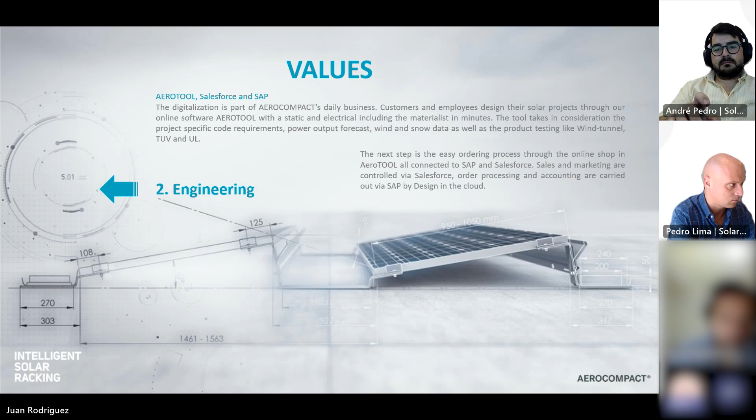Second, engineering. Without a strong engineering team, we will not be able to produce such valuable structures. Aerocompact takes pride in having a very strong engineering team based in Sulz, Austria. More than half of our workforce works in an engineering role. This has allowed us to work with economic powerhouses such as Amazon, IKEA, Audi, or Aldi. Also, a strong emphasis on engineering has led us to the full digitalization of the business with the help of our tool, AeroTool, which we'll talk about later.

And finally is the product, the end product. We carry 4 product lines: compact flat for flat roofs, compact ground for ground mount, compact metal for metal roofs, and compact pitch for pitch roofs. All are tested at a high level internally and externally. And the constant innovation and digitalization allows us to design and optimize our products regularly and make them more attractive to the market.

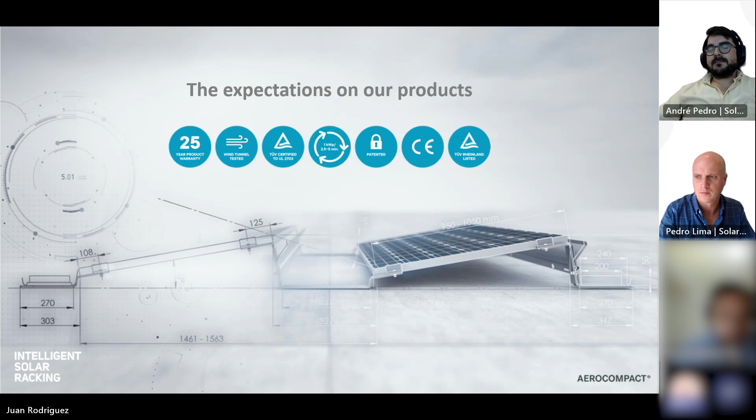So I would now like to give you a glimpse into the very important engineering services behind our products and the services we provide our clients. We place high demands on our final products. We have high expectations. Through our engineering services and high standards, we have obtained all necessary certifications for our products. We have all the CE markings, all the TUV markings. And our strict engineering practice has resulted in being able to provide you with 25 years warranty on our structures, which I think is one of the highest in the market at this moment. And a very important part of our product development is the wind tunnel testing of all our structures. Here at the Institute... I'm sorry.

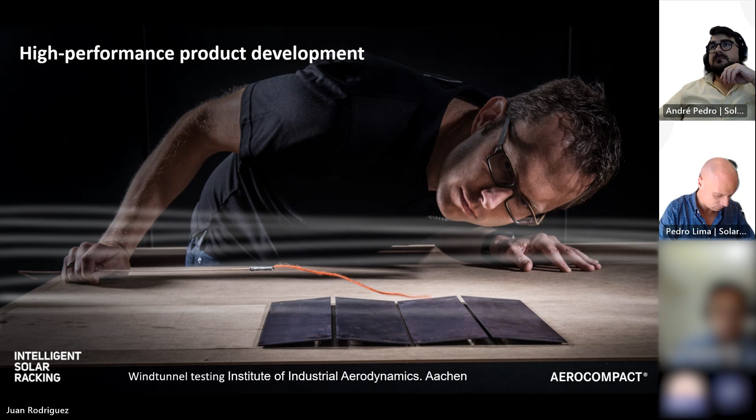Another institute we work closely with is the Institute for Physical Material Research in Vienna. We use their services and know-how to guarantee the strength of the material in our structures. And these are just some photos of the ongoing testing we have with them. So, material strength test.

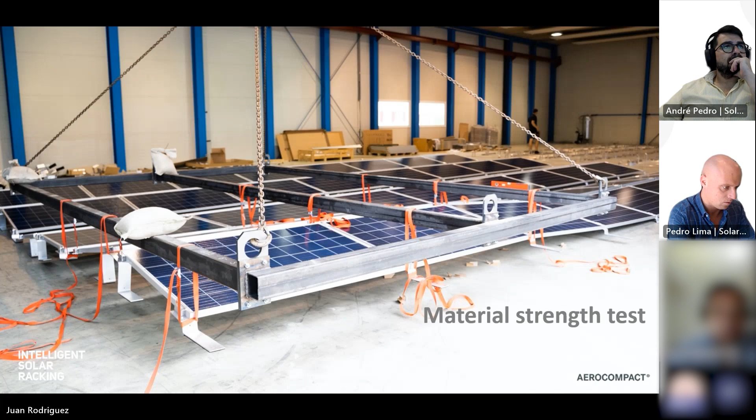We also work with the TÜV Rheinland for comprehensive analysis testing. So as you can see, and finally, before I forget, our software development. We have the Aerotool software. Solarshop have used it, and we will provide you with some more information later on.

Okay, so just to end this brief introduction to Aerocompact, the company and its engineering philosophy, I will play you a quick video portraying the engineering behind the products. Okay.

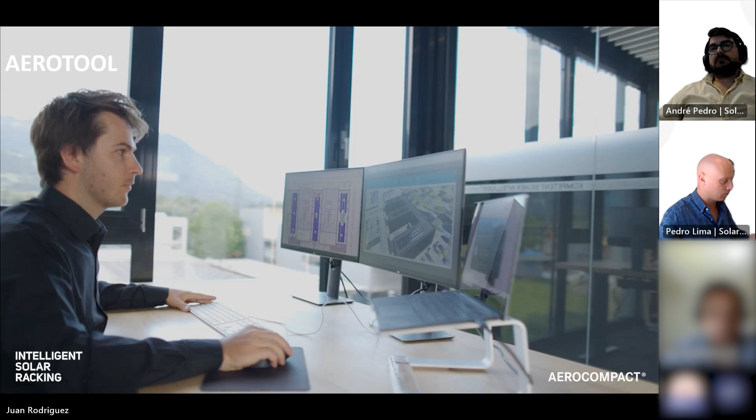Okay, so we will now do a quick overview of Aerotool, which is our leading design software for commercial solar projects. At the end of the PowerPoint presentation, Christian Frasser, my colleague, will do an online tutorial on how to do a quick project.

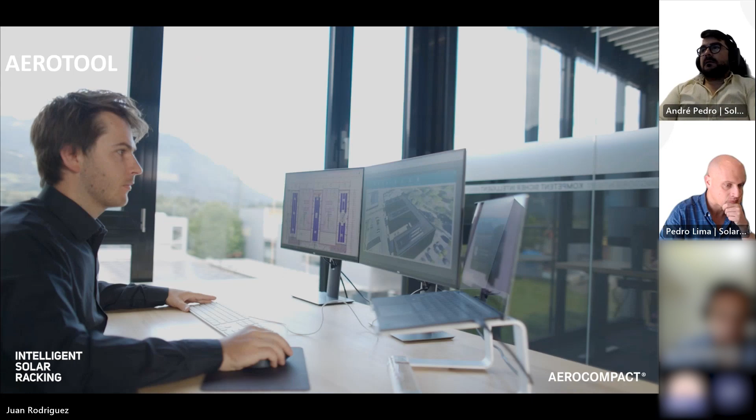So what is Aerotool? Aerotool is a powerful 3D planning software engineering tool. We give you, the customer and employees, a tool to plan and engineer solar systems worldwide via Google Maps, and to create a project report with location specific static calculations in just a few easy steps.

So Aerotool offers Google Maps, roof layouts, fast and easy project reviews, structural calculations according to EN regulations. It considers all the shadows, has a central project management, saves resources, layout assembly for all the projects, a bill of materials output, and a calculation of yield.

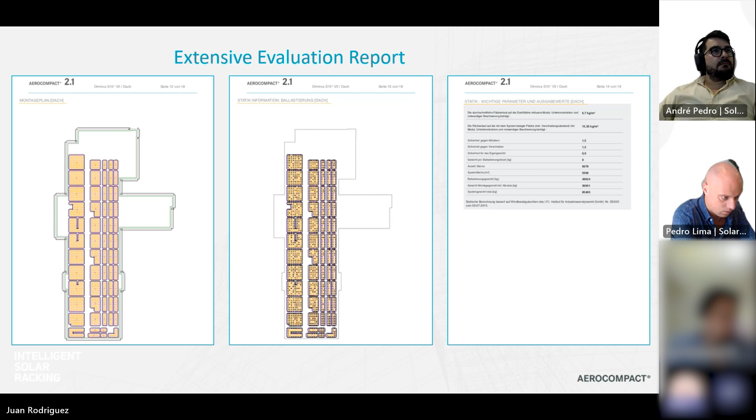So, for example, at the end of the planning process, you will generate an extensive planning report, which includes, as you see here, layout plans, static information for ballasting, and other parameters relevant to the project. So, easy planning offers static calculations, as you can see here. It gives you numbers. This is the number of ballast this east-west configuration requires.

Okay, so for example here, Christian will give you more details, but this is a long tray which requires 10 ballast stones. So it really does calculate to the millimeter the amount of kilograms of ballast the installation requires. And it also provides a 3D Google layout and also all the electrical layout.

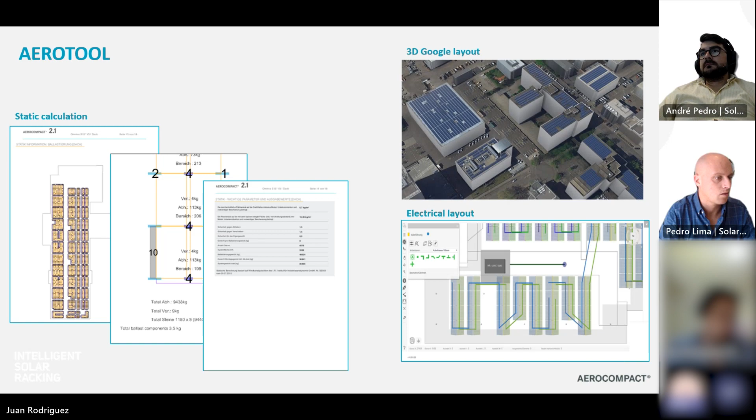So we offer two Aerotool versions. The majority of you will have access to the Aerotool standard version, and within Solarshop they have access to Aerotool Pro, which we use as well within the company.

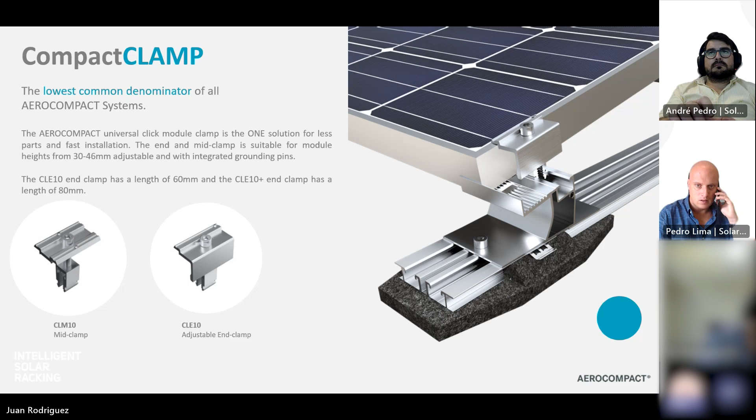It's also adjustable to between 30 and 46 millimeters, and it all comes pre-assembled. The way it works is very easy to clip onto the modules and onto the actual system. So here we have the middle clamp, and then here we have the end clamp. The end clamp comes in 60 millimeter length and 80 millimeter. 80 millimeter is for the flat roof installations, and they're also available in black, just in case you require it for your project.

So let's start with the S, which is our basic south-facing flat structure. This is available in inclinations of 5, 10, and 15 degrees. It's very flexible, adaptable. We believe it's the most flexible system on the market. It's very easy to transport and very easy to keep in stock, and it has been aerodynamically tested in our wind tunnel. It has a very high installation speed. The water flow on the roof is not disturbed. The water can flow freely, and it's all metal components.

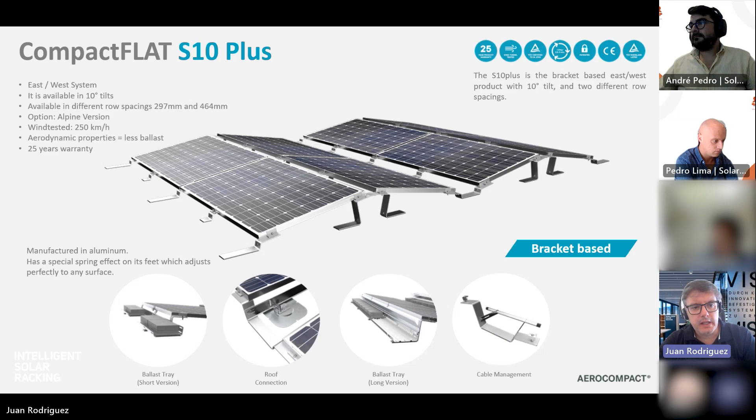Okay, so as before, it all comes pre-assembled as well. So a few parts. Sorry to interrupt you again, João.

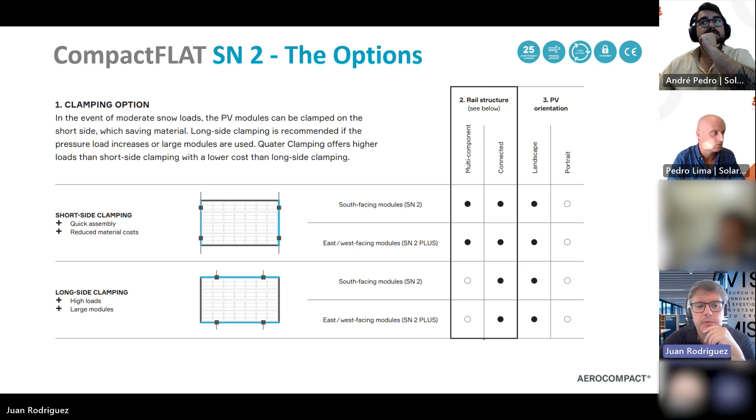And also we have 3 rail structure options with the SN2. So the multi-components can only be used with short side clamping for smaller panels. And then we have the connected structure, rail structure, and the long rail structure for long side clamping. And this allows for 20 different ways, system variants.

Okay, so this SN2 system, it just came out, so we're all pretty new to the system, but it's going to offer lots of flexibility and cover any installation projects you may have. You can see all the variants on our webpage with more detail. Okay, so I would just like to show you a brief video so you can get a better feel for this system. Okay.

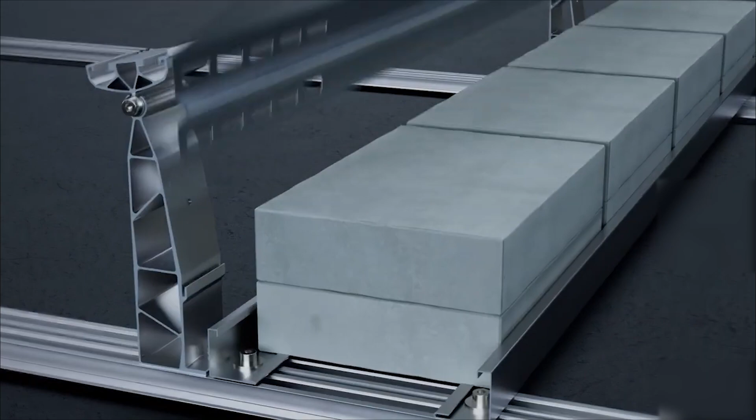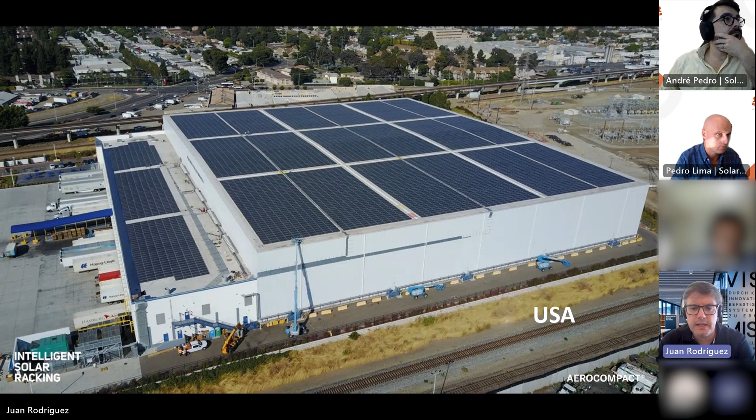Okay, and some examples of projects with these type of flat structures. These are all done with the first one we saw, the East-West, the S10 Plus. Okay, so IKEA Austria, New York, and Austria again, USA, and one of our most emblematic projects is the Helsinki Music Hall. This was done last summer. And it was a very interesting project for the company.

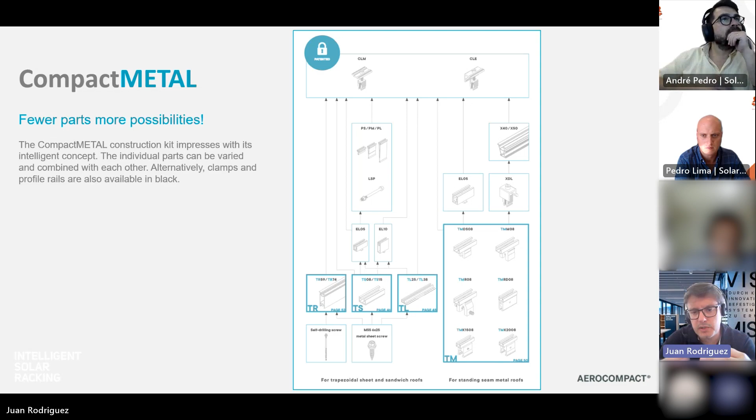Okay, we will now look at the compact metal family. These are structures used for mounting PV modules on metal sheet roofs, such as trapezoidal, corrugated, or standing seam metal sheet roofs. On this diagram, we see the compact metal construction kit, which is formed by many individual parts that, when combined with each other, can suit any metal roof projects you may have. So let's start with the TS.

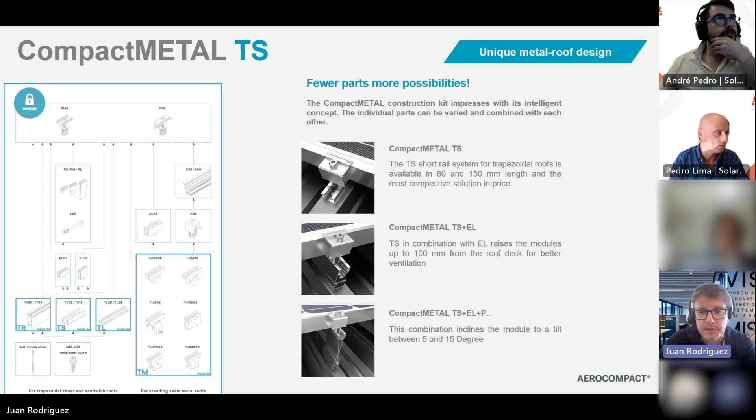This is suitable for any metal roof, including trapezoidal or sandwich panel. This is only suitable for horizontal installations, and the TS comprises of a micro rail and a clamp. Okay, the micro rail is available in 80 and 150 millimeters length. Here you can see in more detail. This is our most... Sorry to interrupt me again.

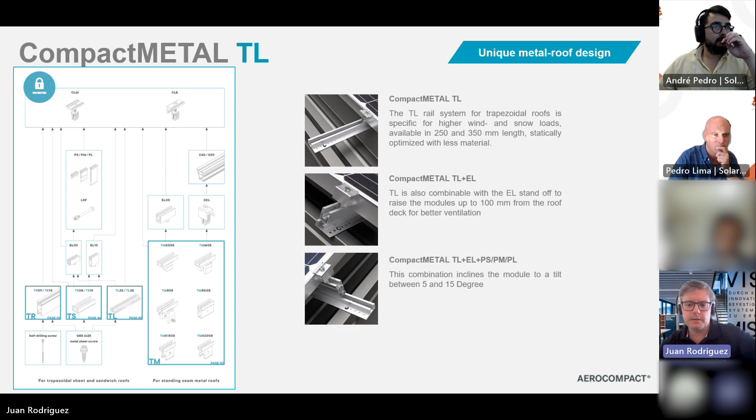Okay, thank you. Okay, so we're moving on to the bridge system. This is suitable for portrait installations, and the bridges, which are these, are available in 250 millimeters and 350 millimeters in length. So again, we have the most basic of configurations, which is the bridge and the clamp. That's the basic configuration. As before, we can also add some elevation to the installation to provide more airflow.

And as we previously saw, we can use a tilt adapter. This is quite popular because with portrait installations, they always like to give it some inclination. So with this, you can give it up to 15 degrees inclination. It's possible with this adapter. And this is a very popular way of installing in portrait mode.

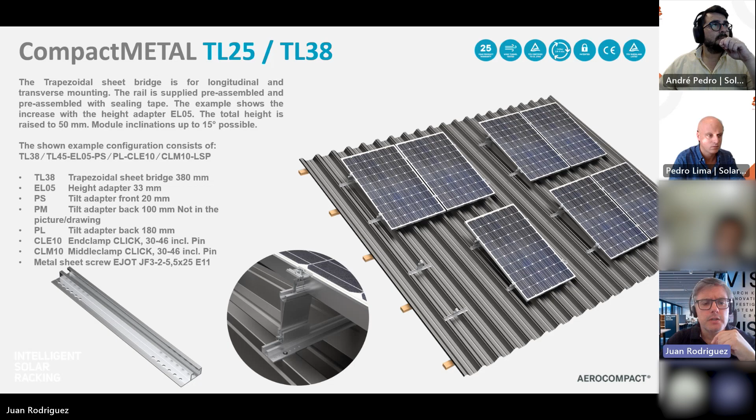Okay, so here we see, for example, the TL bridge rail with the tilt adapter. You can see it there. So both used in conjunction. This gives it some inclination. And in the following example, notice that the roof is rounded, and the inclination made it possible to install the solar panels.

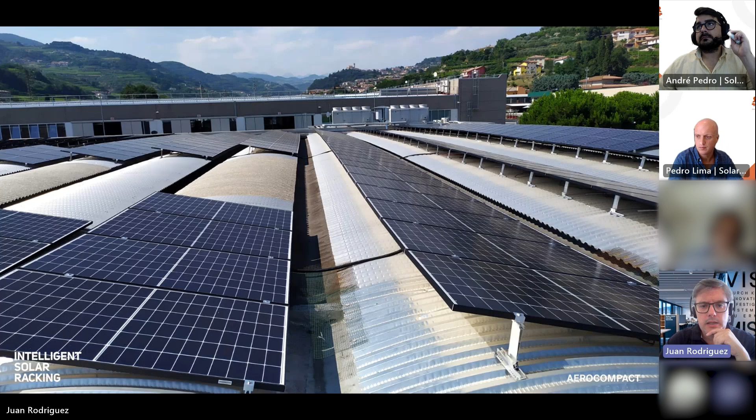Okay, so I'm going to move quickly through the TM range of clamps. I'm not sure if in Portugal these kinds of standing seam roofs are very popular. In Spain, you're starting to see them more and more. They're usually made of steel and zinc. And what we have is a standing seam clamp. What it does, it just clamps onto the standing seam. There's no need to make holes on the roof and no screws. So it's a very clean installation for these types of roofs.

I'm not sure, guys, if this is very popular in Portugal, or maybe it's becoming more popular. Starting to see something, but not too much. Not too much.

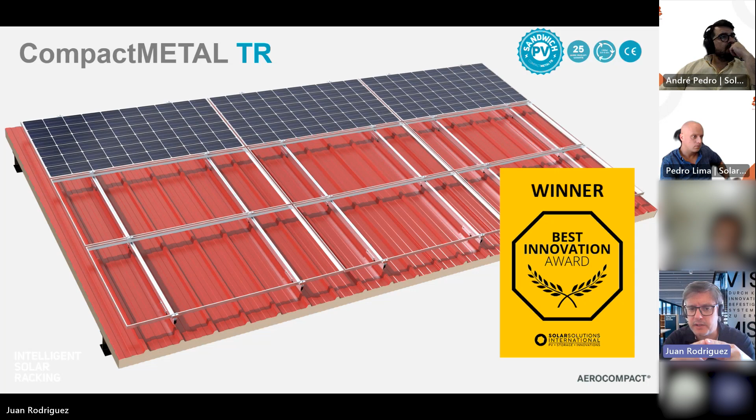Okay, and finally, the TR. This is one of our newer structures. We presented it in January in Madrid, at the Solar Festival. And this was the winner of the Best Innovation Award at the Solar Solutions International Show in Amsterdam. The TR has been designed in collaboration with panel manufacturers like Kingspan and Fischer. We did it together, and the TR has been designed to be used specifically for sandwich panel roofs.

This means that with this kind of structure, there's no need for approval by the panel manufacturer to install solar structures or panels. And an installation with this system will protect the warranty of the panel manufacturer, the module, and our own warranty of 25 years. So what happens with sandwich panels with other structures, the layers at the top can easily separate when there's a strong gust of wind or with time. Normally the structure is just screwed directly to the top layer, and it's not very stable, to be honest.

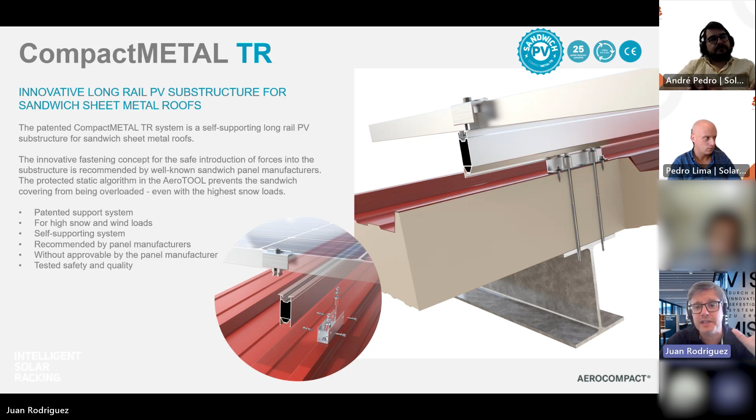So we have solved the issue with the TR. It's a fastening system patented by us, and it's the first solution in the market that doesn't damage the sandwich panel. This has been accomplished by connecting directly to the purlin, the beam below, with self-drilling support screws. You can see here the support screw goes directly to the purlin of the building. So all the pressure of the panel is on top of the beam, not the sandwich panel. It comes down to the beam. So this protects the roof completely.

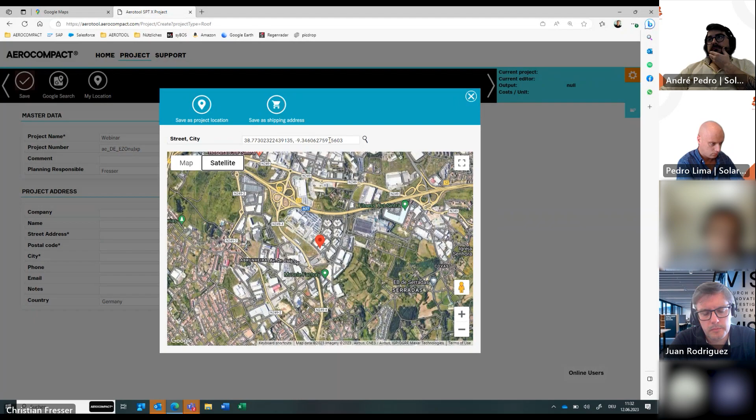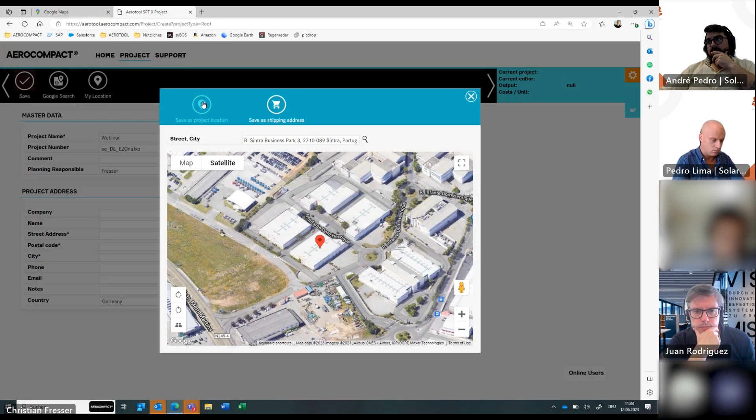So you will get a map where you are. When we zoom in a little bit, we can see, are we at the correct building or not? You can also simply just choose another building when it should be the wrong one for some reason. And then just press on save project location, and the address is taken into the fields.

On the right here, you can also define a shipping address. If you know from the beginning that the material should be delivered to the project site, you can already fill it in here. So you can either do it manually or with this arrow, just copy it to the right side. Okay, so let's save and move to the next step.

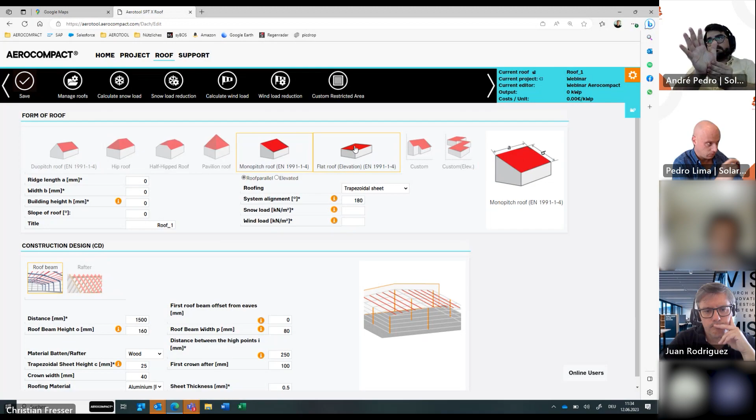So the next part will be the definition of the roof you have. So as a first step, you have to choose if it's either a pitched roof or a flat roof. And you have some options up here. So you have this duopitch, a hip roof, mono pitch roof, or a flat roof. Using those options, you can see here you have to define the ridge length and the width. So A and B, for example, for this flat roof.

The other option, that's the one we are normally working with, is this customized roof shape. So there is one for pitched roof and one for flat roof. The big advantage there is that you can draw the roof manually if, for example, you have a good Google Maps image, you can work with that. Alternatively, you can also upload a roof drawing to use it as a background image. It always depends a little bit on which one is more comfortable. But yeah, like I said, we normally use the customized one.

So for that, you just have to define a building height in millimeters. We take now 10 meters. And we are planning now a flat roof.

You have to define also the slope of the roof. So also when you have a flat roof, you will never have 0-degree slope because the water has to move away somehow. Otherwise, you would have a swimming pool on the roof.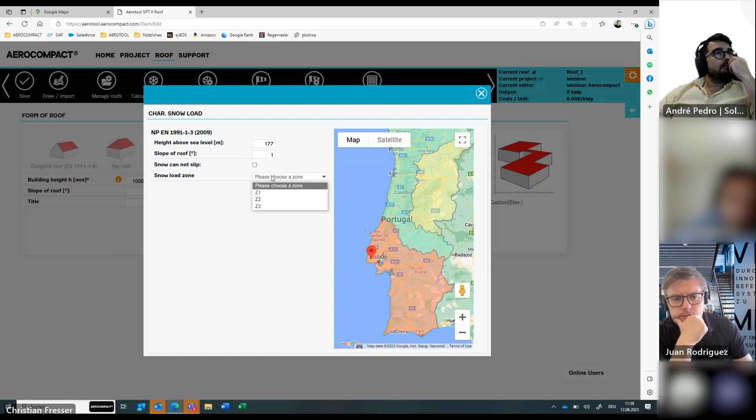You can see it here when you click on snow load, the map will open up again, and you will see the different zones you have in your country. And for the snow load, it's quite easy. Just choose the zone you have, and the snow load is calculated. Anyway, in Portugal the snow is not the biggest issue, I would say.

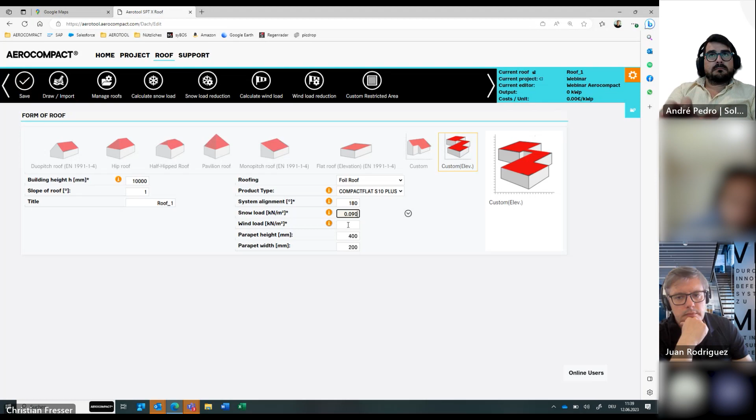So maybe sometimes you will have some troubles with the wind load, especially when you are directly at the coast. But like Juan said, with our systems, we normally find a proper solution to fix everything properly. Wind load: you can see here again, we have zone A and zone B all over Portugal. Zone B is especially on the coast, and zone A is more inland.

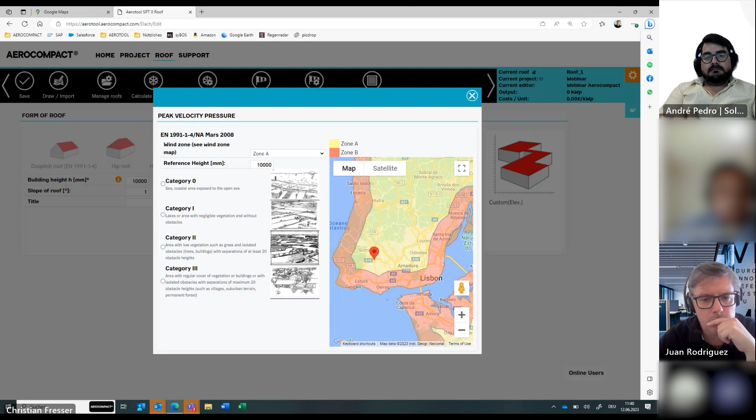And on top here, I think that's a mountain area or something like that. You choose again your zone. So we go with zone A now. And then you have to also define the category you are in. These categories came from the EN, the Eurocode standards, and they have done a separation based on the location you are. When you scroll in here now, you can also activate the satellite images.

What you have to do here is to check a little bit the surroundings of your project. Like here, we are in a commercial area, so a lot of industrial buildings around there. So here we can go with category 3. So it's area with regular cover of vegetation or buildings with a separation of maximum 20 times the obstacle height. There's always a description there to get a better feeling which zone to choose.

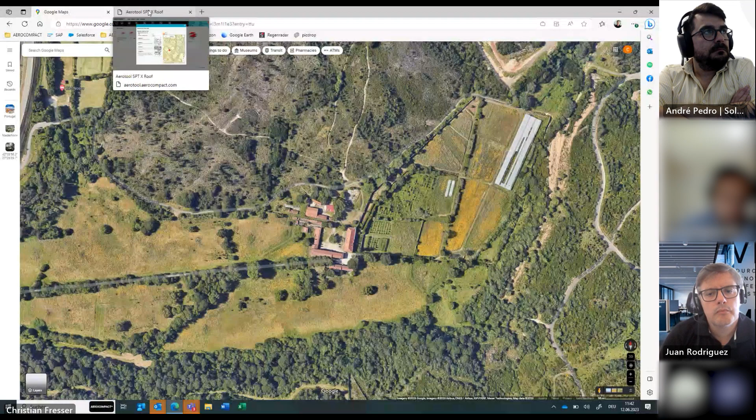Just jump to Google Maps real quick. For example, when your building is like here, you have almost no buildings around. There are a few trees, fields, and so on. So when we would have to plan in this area, we would have to go with category 1, I would say. It's not a lot around it, but just for you to get a feeling how to choose the different categories.

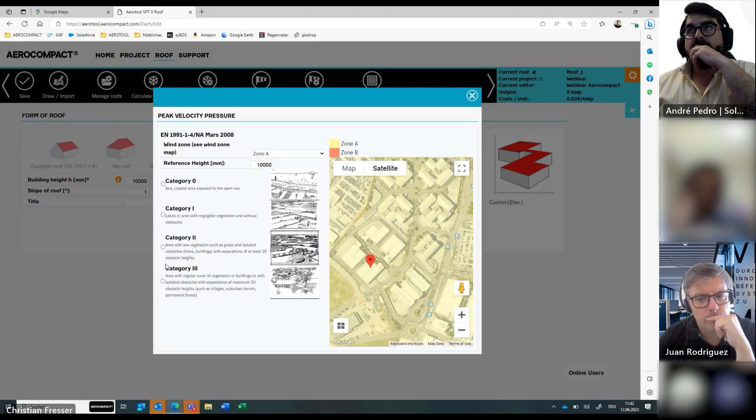And it's quite an important part, because if you choose the wrong one, depending on the category you choose, the wind load will be calculated. So if you calculate, let's say, too good here, that can have an impact during heavy wind situations. Let's say it that way. So we choose now category 3.

You see the wind load was calculated, and here you can do now a wind load reduction. That's also written in the Eurocode, so it's allowed to reduce the wind loads slightly. You have here the option 50 years is standard, and you can do it 35, 25 years. It would be possible for 20 years also, but we never do it.

We give 25 years warranty, so we say, okay, up to 25 years reduction we can do, but we don't go below. The difference is, just to show it real quick, we are talking now from 0.779, which is the standard wind load there. When we go to 25 years, we can reduce it to 0.697.

Yeah, sometimes it helps when we have projects where we have not problems but difficulties to get a proper static, or if there are regulations from the structural engineer, for example, that you are only allowed to put a certain amount of additional weight on the roof.

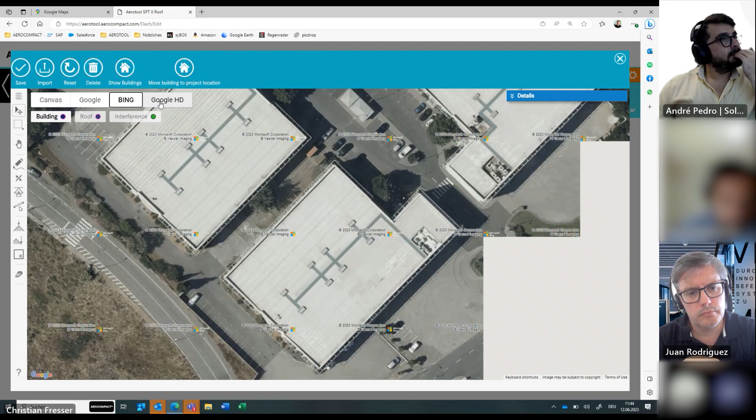When we go now to draw, we get again the Google image. Here you can change between Google, Bing, and Google HD. It always depends on your location whether you have Google HD available or not. But Google is normally always good enough to do the planning.

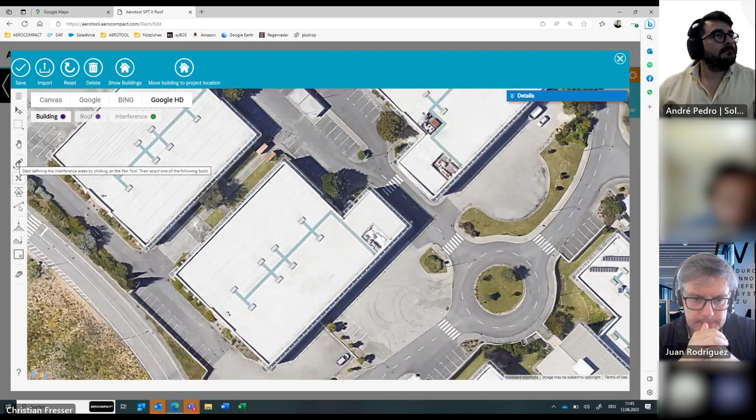With this pen here, you can draw out the roof you have. There you have the option to make it manually, so whatever shape you have. The second option would be to draw a rectangle only. And you also have the option of drawing a circle, but that's not really for the building itself, but when you have chimneys on a roof, for example a round one, you can use that.

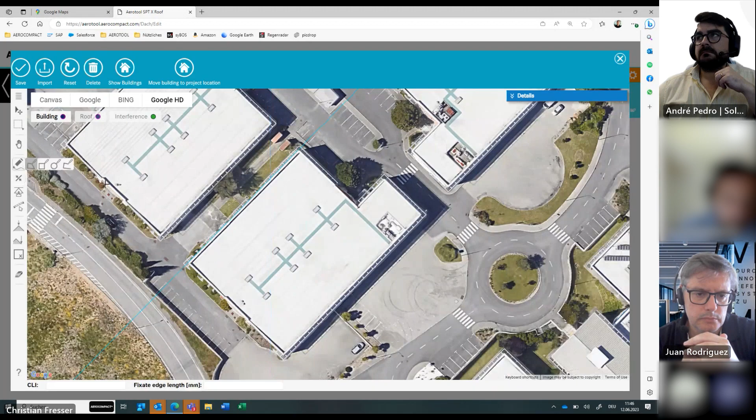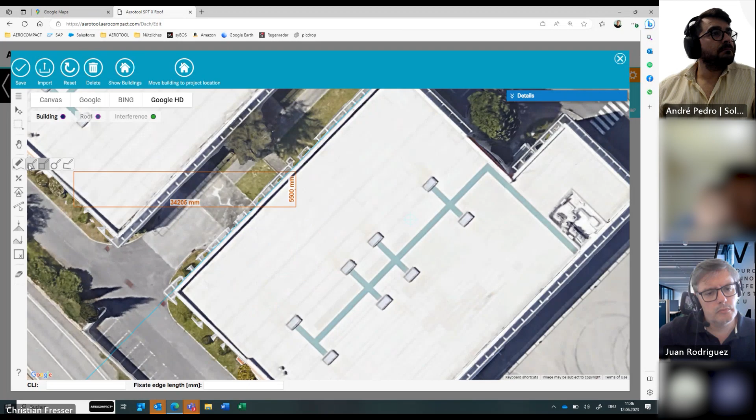I will use now this guiding tool here. That's how we normally do it. So we take this length as a reference. And the good thing now is, you see, when I draw the rectangle, it's always oriented directly south or north. When I press the shift button, it aligns to the building side I have chosen. Just really quick, I don't think it has to be 100% accurate at the moment.

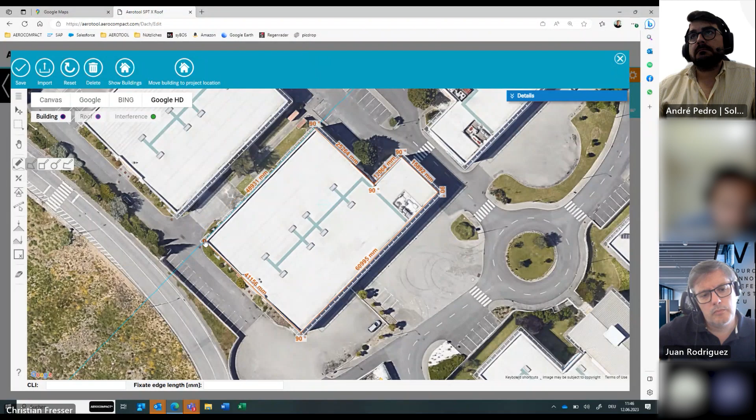So you outline your building, and when you are back at your starting point, you can see the cursor jumps into this area, and you can close the line, and you have outlined this roof now, for example. The same applies now. As you can see here, we have some interference objects on the roof. Again, you have two possibilities. You can either draw the interference objects in here, like this.

You can draw it from the beginning. And on the right up here, you see the interference areas. Here you can also define the height of these interference objects, in case you want to use the shadow calculation. Then you can define it. Let's just try some different numbers to show you afterwards how it looks.

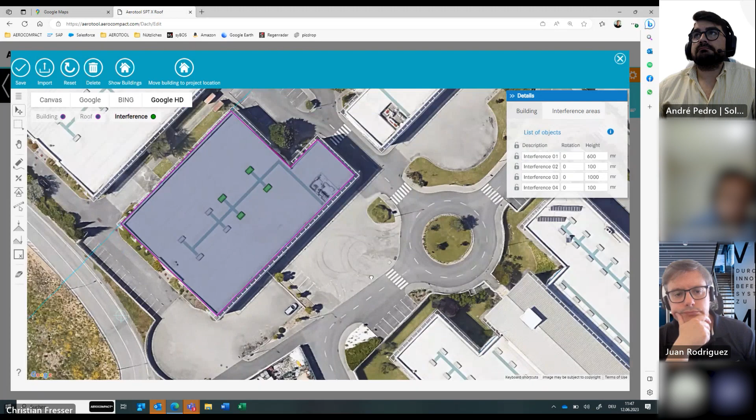Once the roof is drawn, we have here this arrow, and with this arrow we identify the orientation of the modules. So you can see here, when I place it, for example, here, all the modules will be oriented according to this edge of the roof. That's quite an important thing to do.

If you don't do it, the software will automatically orient the modules directly to the south. Sometimes it makes sense to do it that way, but most of the time you are losing space on the roof, and at the end you cannot put as many modules on the roof as you maybe want to have.

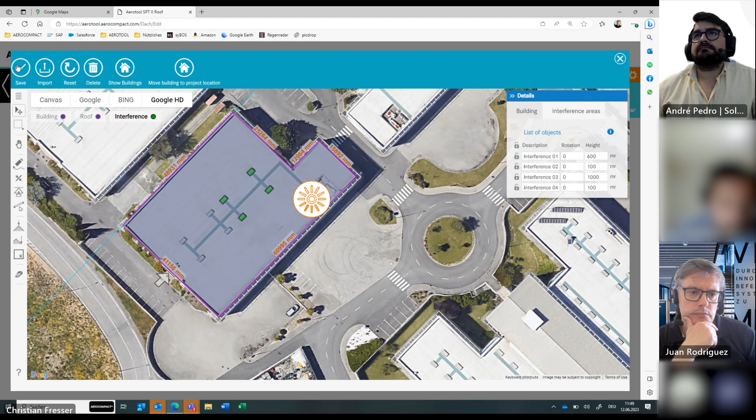Okay, so everything is drawn. I click on save, and save again as we filled out all the data. Here we get a short message, just an information that if you change anything on the roof, you have to redo the layout.

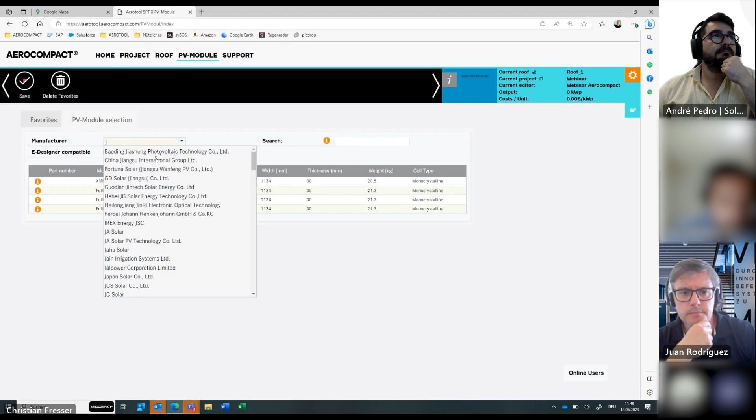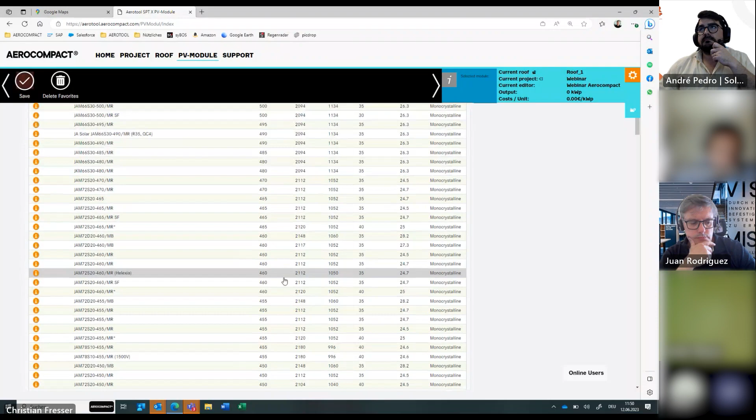The next step is selection of the PV modules. We have in Aerotool a big database with hundreds of different module manufacturers. So normally everything you're looking for should be there. If not, just let us know, and we can add the missing module to the database. That's normally possible within a few minutes, maybe an hour. Based on the database, you can choose your module. I will take now just a random one to continue.

So the next step is the design tab. Here you do a little bit more specification of the system itself. For example, for this east-west, we can define if we want to have the short connector in between here, or the long one. You can see now we have the long one with 350 millimeters. When I activate the short distance, it changes to the short connector, and the gap will be only 182.

That's a layouting issue, or topic. So it always depends on the project. Our Alpine system is normally not relevant for Portugal. That's just when you have heavy snow loads, you can put in an additional bracket in the middle of the module.

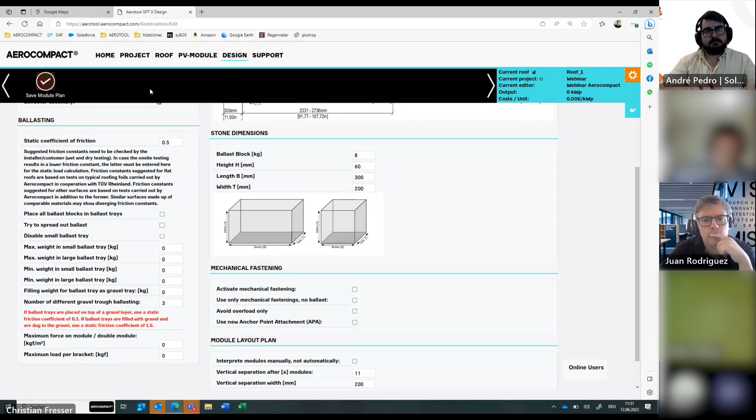You can include jumper pipes for cable here, and like I told before, we have here the friction coefficient, which is 0.5 for membrane roofs. That coefficient is based on tests our engineers have conducted, and it's an average value. Or the other way around, when you have a project, you can do a friction measurement on your roof to check what's the actual friction value, and we can use that for calculation if needed.

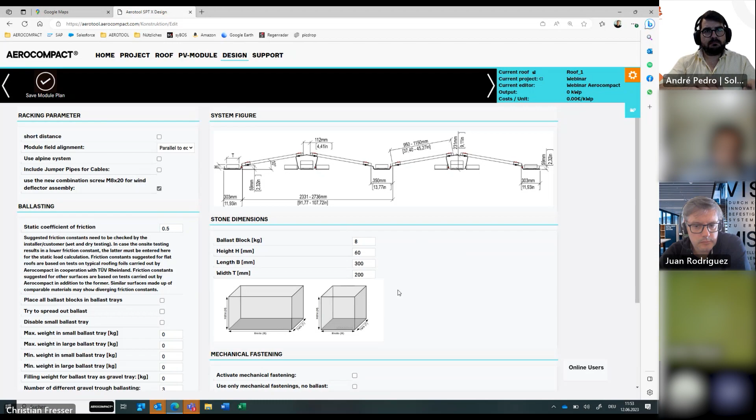And down here are some options for ballasting, but you will anyway get used to that once you're working with Aerotool, so we'll not go into too much detail right now. On the right side here, you can define your ballast block dimensions and weight. That's quite useful because it depends a little bit on the region which blocks are available. As a standard block, we have this 8 kilogram block with 300 by 200 by 60. That's just quite a standard dimension here in Austria, so we had to define something. If you have a different one, you just change it according to the specifications you have.

Below that you have the option for roof anchoring if it's needed. Like I said, if you are, for example, directly at the coast, it can be necessary to install some roof anchors to properly fix the system on the roof. But normally it's a last option to realize a project. Most of our customers don't use it because it's always a bit of a problem to attach anchors on the roof, especially if you have to drill through the roof surface.

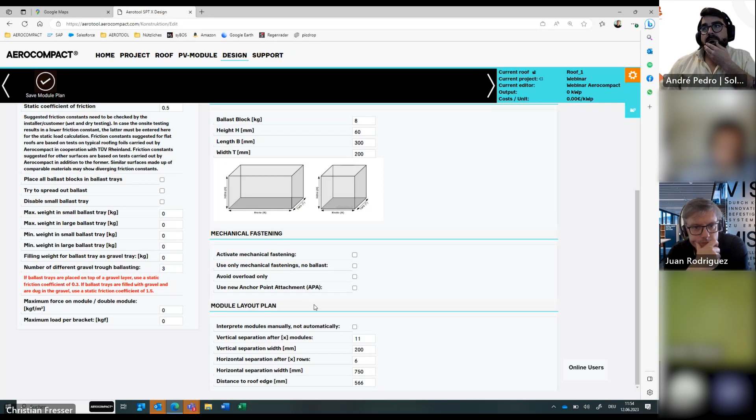And on the bottom you have a module layout plan, where you can define your module field sizes and the distance to the roof edge. Like I said, there are a few points to play with. We will keep it now as a standard. So when we press save and go to the layout area, we can see the software has done our automatic module alignment, which normally has to be adapted a little bit. Like I told you before, we have put in these interference objects here. Depending on the height I have defined, they will be shown differently.

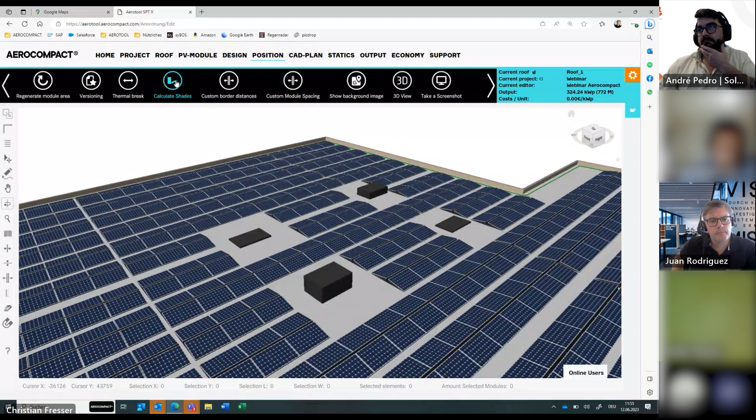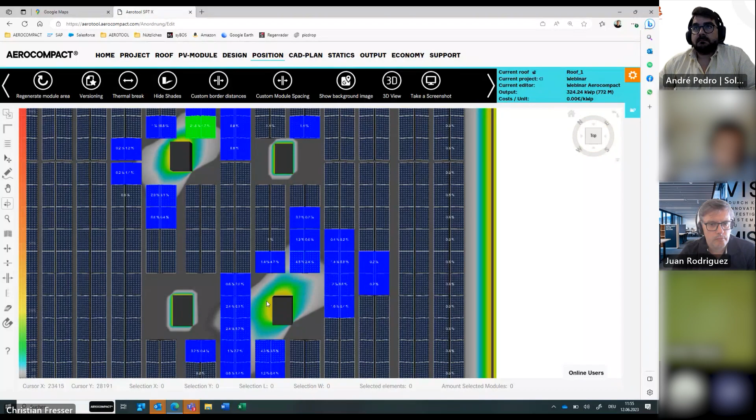And you have up here this calculate shades option. When we activate that, we get information about which modules will be affected by shadow, for example from the parapet, or from the interference objects we have on the roof. Here we have only 100 millimeter height, so the shading is not an issue at all. This one has 1 meter height, so it has more effect on shadowing modules. The higher it is, of course.

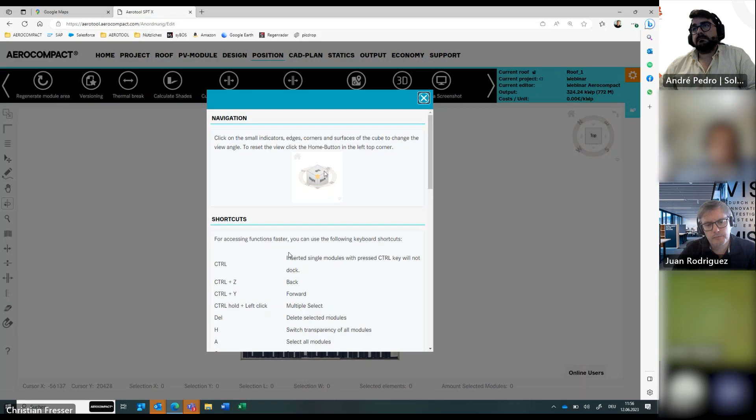You also have here the option show background image. Activating that, you can see the Google image is shown as a background. It makes planning easier. There are some short keys when you go to this question mark on the left, with some helpful information and short keys which are quite useful when planning. Just as an example, if I press H, the modules become transparent, so you can see the background better. Using that, I can do the planning more accurately, as I'm seeing what's underneath.

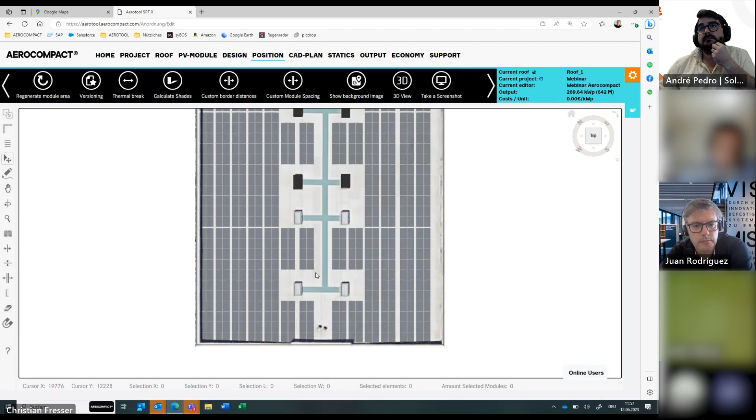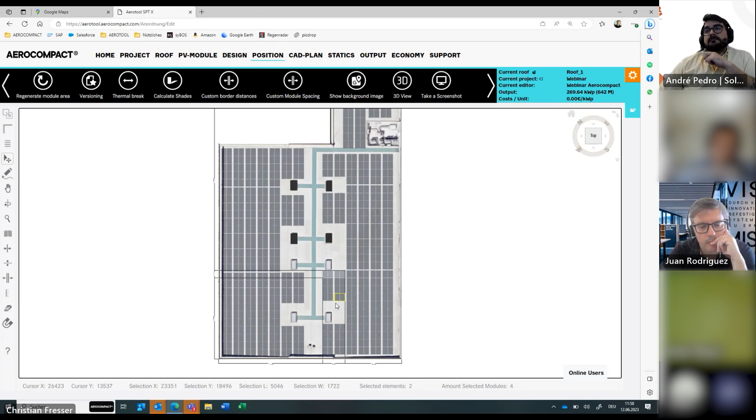So delete this. What's this? Missed one. I will just do it real quick now, just to show you what can be done in the system. Move a little bit up here. Yes, just that as well. Again. So just as a rough planning here. Let's assume the layout is fine like it is. So, moving modules everywhere you need it.

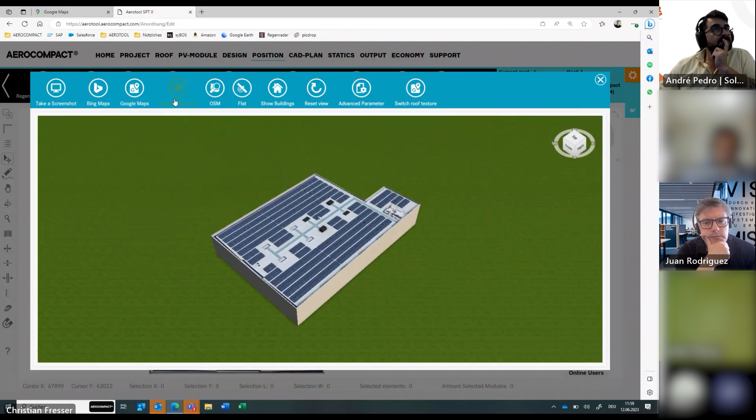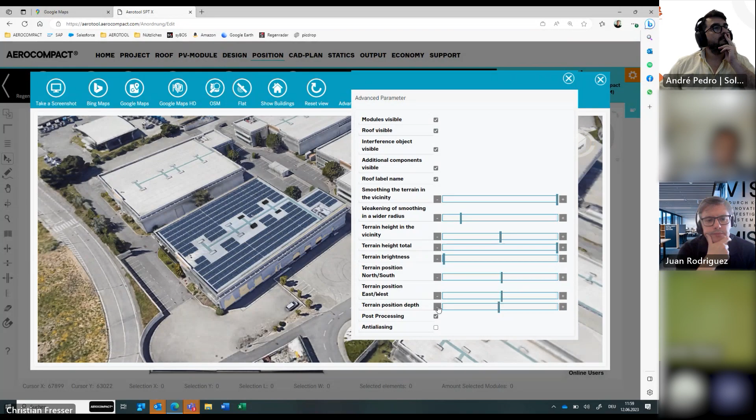Once it is considered fine, we can move on to the next step, or we have here the option for a 3D view. That's quite a nice feature, especially for your customers. So when I activate Google Maps HD, advanced parameters, we can adjust the depth where we are. I have just assumed that the building is 10 meters high. Maybe it's a little higher, maybe a little lower. That's why the modules were not shown before.

So we can quite nicely show the customer how the project will look. For example, if I want to show him this view, I can click here on take a screenshot.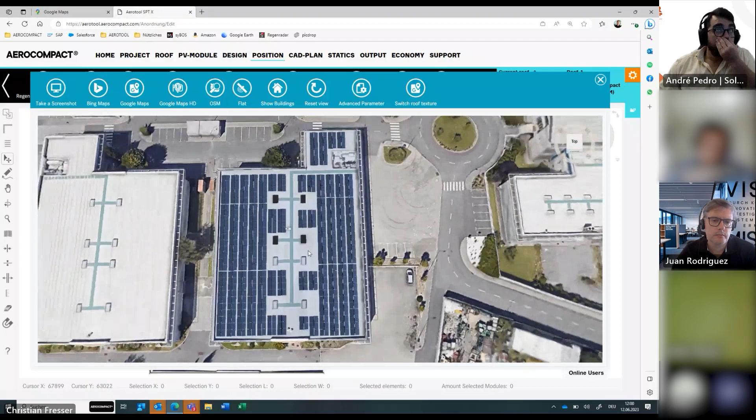That's safe. It's like this. Just making one or two screenshots, and those will then also be included in the project report, and it also gives your customers a better feeling of how everything will look.

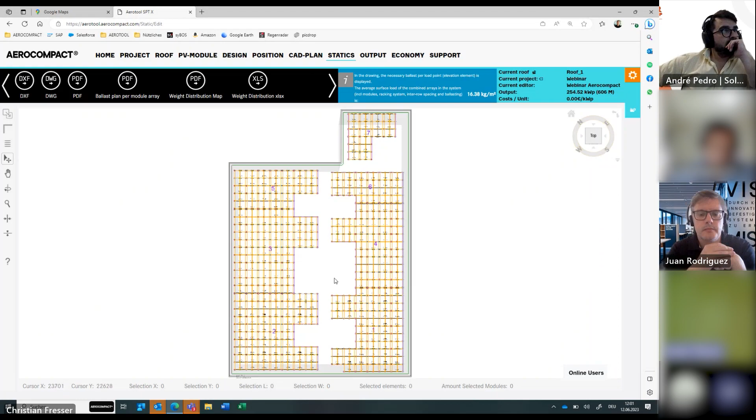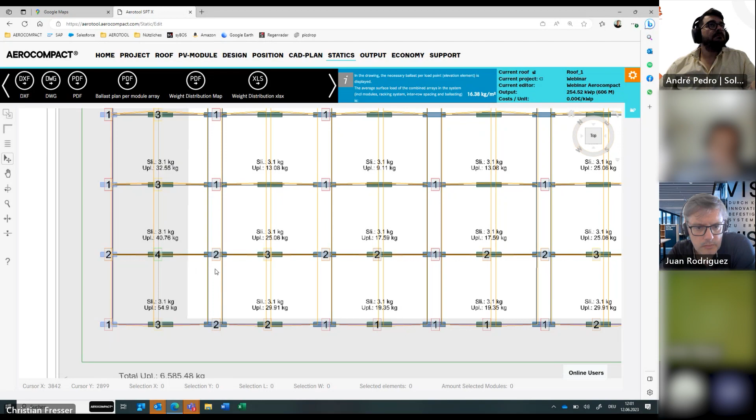Okay, so the next step will be the static. Click on it. Depending on the project size, it can take a couple of minutes until you get the static results, but normally it's quite fast. So when we scroll in here, you can see now for all the module fields, 1, 2, 3, 4, the static was calculated, and you can see based on the numbers here how many of these 8 kilogram blocks we have chosen have to be placed and where. So 1 here, 2 here, 4 here in the middle on this bracket, and based on that, it has to be ballasted at the end on the roof.

Here, for example, it's not a problem. Here we have a short ballast tray to use. When there is a problem with the statics, if there is an overload or you have to put more ballast on the brackets than you actually can, the affected modules will be shown in red, and it is written in there: overload. Then you have a visual idea where there are problems, and then we have to look at what's possible, what can be done. Do we have an option to maybe modify the module layout or whatever.

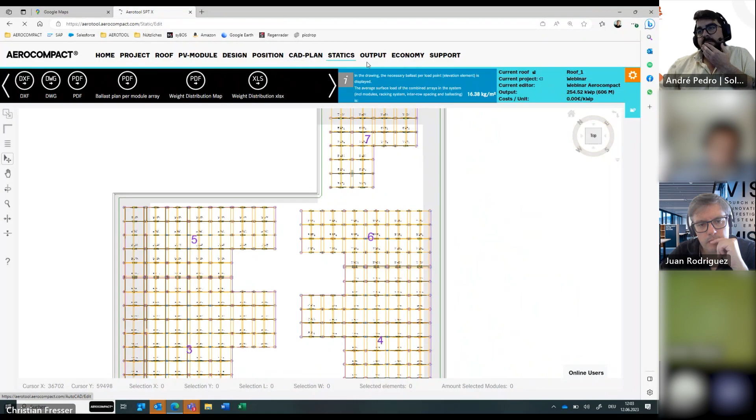If the static is fine, the next step is the output page. So I skip the CAD plan now. It's basically the same information as here in the static, but you can do a few measurements there and so on. On the output page, you will get your bill of material. It mentions how much of each part you will need to install the project. And you can export a PDF or Excel file from this bill of material. And on top here, you can create your project report.

You can change the language here. I think Portuguese is not yet available, just in case once it is. We normally do this compressed PDF just to reduce the file size a little bit. We don't show the prices here. And on the right, you can also define which additional information you want to have in the report. In the end, it's your decision what you want to have in the reports. You can put in extended structural calculation details. You can include the list of materials. When you have the Pro license and are also doing the electric part of the system, those can be attached to the report as well.

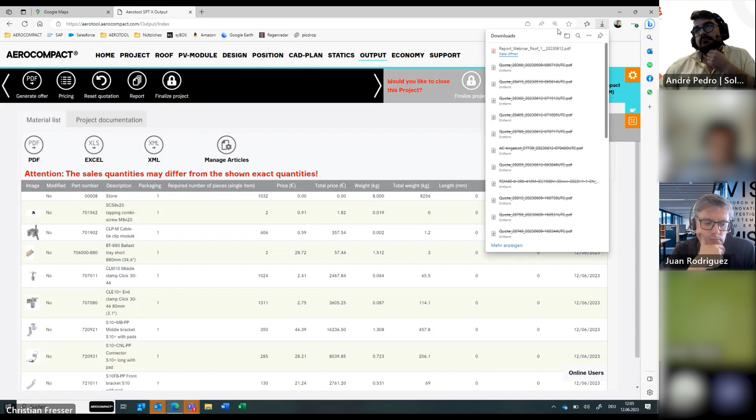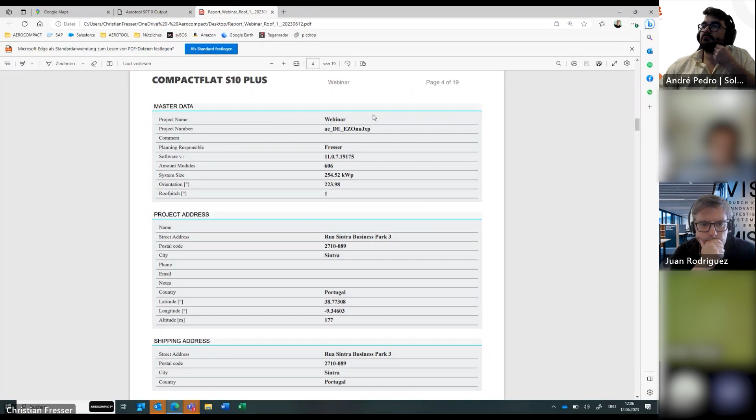Then just click on project report and the generation starts. Okay, then we get a report out of it. So the report is basically exactly the same as what you have done in the AeroTool itself. It's front page, table of contents, disclaimer, and then you have the project data: project name, who was planning, the total size of the project, the address, shipping address. You will get an image of the location where you are.

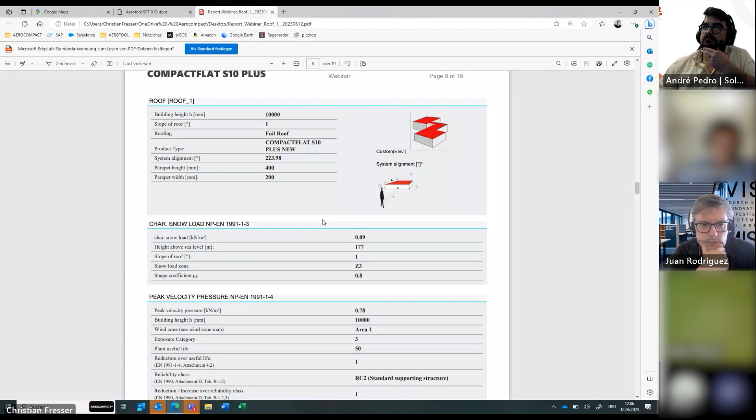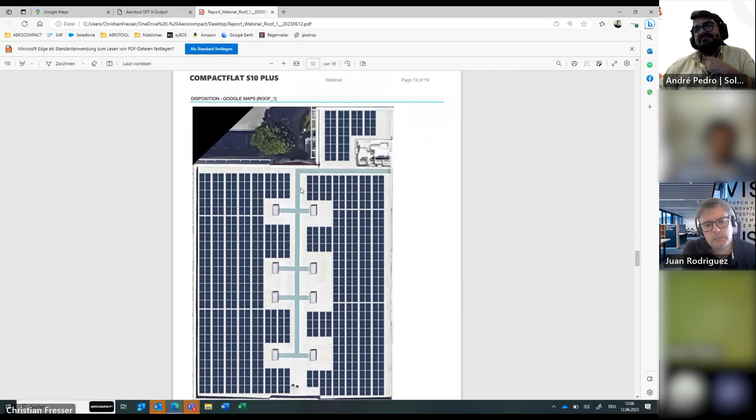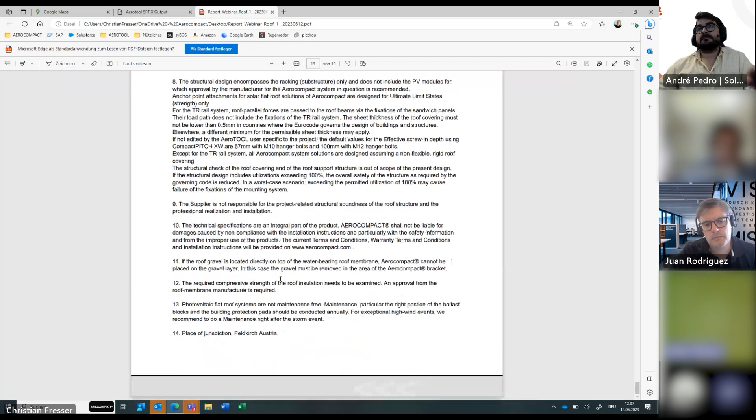Then here you have your 3D view images we have taken. And then it's basically everything you have defined in the AeroTool shown here again. So the roof information, snow load, wind load, module data. Here you have the design area, which system, which connector you have chosen with static coefficient, which ballast zone. The layout with background image, an installation plan, the roof dimensions, the static page. Here you get some additional static information. And you have your bill of material at the end and the disclaimer again. So that's basically how the project report will look in the end.

Yeah, that's basically it. Just to give you a little bit of an idea how the AeroTool is working. It's quite a fast and easy way to plan your projects, and you can be 100% sure that the calculation will be fine, no matter if there is a strong wind occasion or...